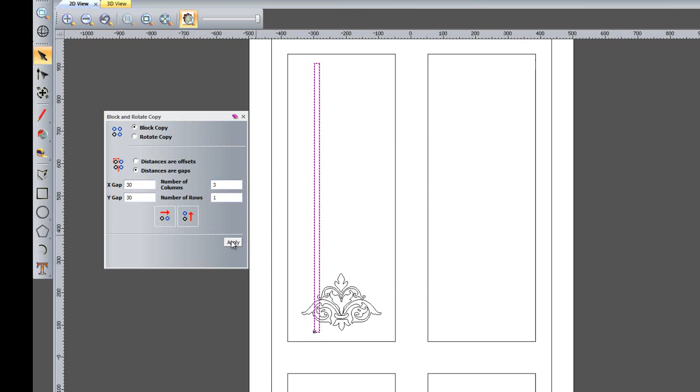It doesn't matter about the Y gap because I've only got one row, because I don't want any coming upwards or down in the Y direction. I just want X copies, and I want 3 pieces to go in X. So if I click apply, there you can see it's copied the part another 2 times going across.

And what I'm going to do with this is to group this again, just so they're all one part, and then shift select the rectangle, and I'm going to center that again. Now I'm going to ungroup this, so if I just hover over the group, you can see below that I have ungroup.

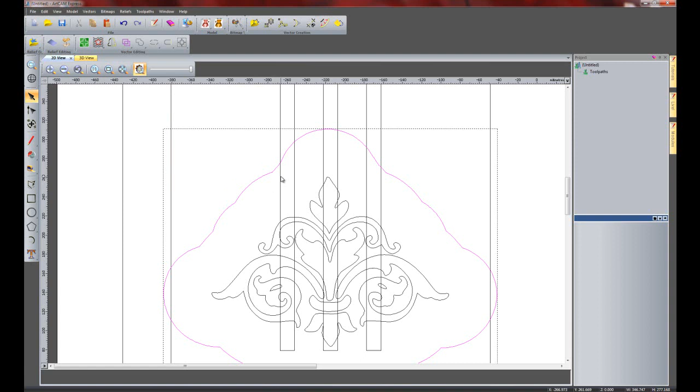And what I'm going to do is just zoom in on the flourish, and I'm going to offset this outwards by 50mm. So this is just going to break up all of the vectors and offset that outwards, because what I want to do is to trim off these rectangles to the offset.

So if I click the trim tool, I'm going to just trim these off here, and trim the offset off, and I'll just delete the waste piece. Now if I select all of these rectangles again, I need to just join those up, because at the moment it's 2 separate parts.

So if I click join, here you can see number of vectors now is 6, the number of vectors after is going to be 3. So there you can see that's 1 vector, that's 1 vector, and that's 1 vector. So that's the top left panel done.

What I'm going to do now is the top right one, and I'm going to show you how to import some vectors from various places. So if I click on the vector drop down and import, here you can see all of the supported types for ArtCAM Express. We have Adobe Illustrator, EPS files, AutoCAD files, DXF, DWG, Delcam files, and Meta files, WMF.

So what I'm going to do first of all is to open an EPS file. Here you can see Corner Art EPS, so I'm going to open that. Here you can see that's brought that in. Just zoom in on it so you can see - it's just a bit of corner art.

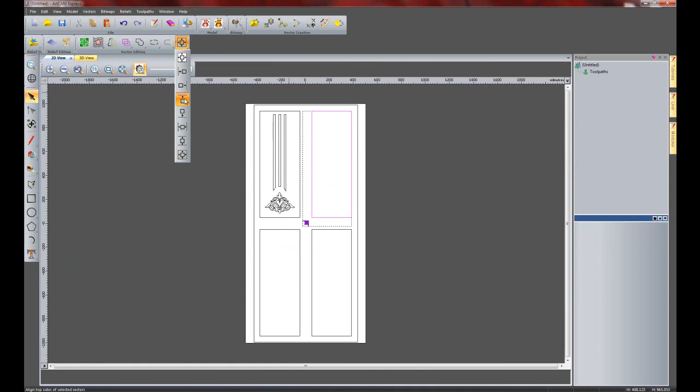And what I'm going to do is just align this. So if I shift select the top right rectangle, and I'm going to align it at the top, and then align it at the right, so it's in the top right corner.

Now what I'm going to do is to transform this. So if I click transform, and I'm just going to scale this up. This time I'm going to press shift just so it brings it the one way, and I'm going to bring it to around about halfway in between the rectangle on X. So that looks about right.

And I'm going to move this in X, so I'll move it by -20, and I'm going to move it in Y by -20, just so it brings it off the top and the right edge. So if I click apply, then you can see that that's moved that. So there we have our corner art.

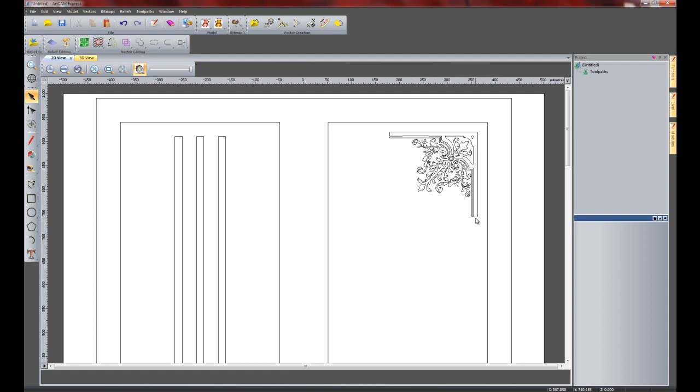What I'm going to show you now is how to do node editing. What I want to do is to make this section here, the vertical straight edge, longer - I want it to come down to about halfway on the rectangle. So the way that I can do that is to select the part, ungroup it so I can edit it, so it's all separate pieces, as you can see.

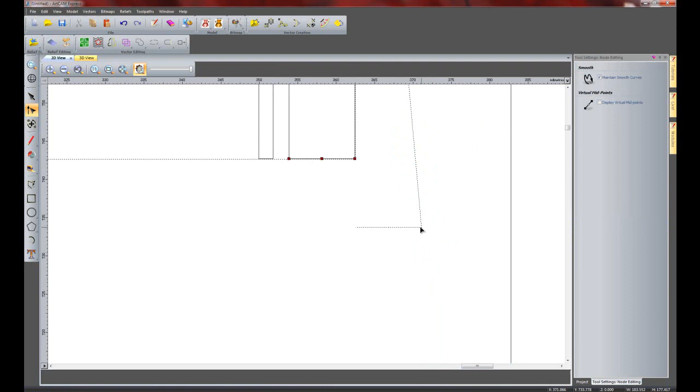And what I'm going to do is to select this vertical piece and click here for node editing. Now what you can do with these is to, if I just zoom in, here we have nodes, and what I can do is, let's say for instance select those, and I can move those. So there you can see I can start manipulating the actual shape.

And what I can do is, if I press Alt, it will give me an angle snap. So I can just move that down to there. I can do the same on this part, just select all of the nodes.

Now this is just a very brief introduction into nodes, and I'm just going to move that down to there. So there you can see I've moved both of the vertical pieces down just so it's almost at the centre of the rectangle. So what I'm going to do now is to just select all of that and then regroup it, because I want to make a copy of this.

So there you can see I've grouped that, and what I'm going to do now is to draw a vertical and horizontal line in the centre of this rectangle.

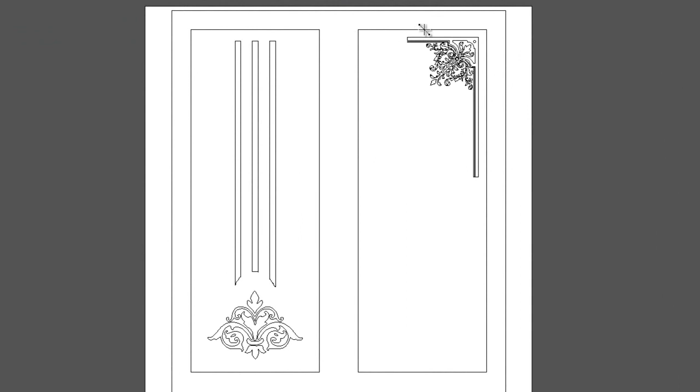Now the way that I can do that is if I hover over the rectangle, you can see I'll start to get this snap mode here. So I can click there and I know that that's in the centre of the rectangle.

Just going to bring it past the rectangle, doesn't matter where, as I'm just going to be using these as guidelines. So there you can see my two lines.

Select the corner piece and select the vertical line first of all, and I'm going to mirror this. So click on mirror vectors - I want to copy the original vectors and I want to do this about the line. So there you can see that's copied that over to there, but I don't want that on that side, I want it to be down here.

So if I select the horizontal line, this time I'm not going to copy and do it about the line. So there you can see that that's moved that to the bottom left of the rectangle. So I can delete my two lines now.

So there we have my two corner pieces. What I'm going to do now is to just create a line. I'll snap to the corner there, snap to this corner as well, and I'm going to go back into node editing. Now if I right click on the line, it gives me options for the nodes. I can also insert a node wherever I wish by pressing I.

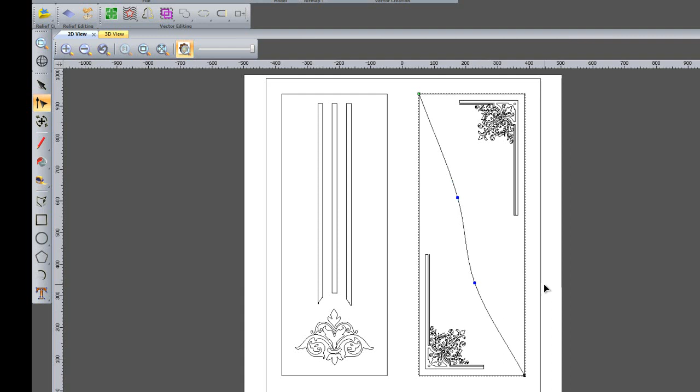So let's insert one there, and I'm going to insert one there. Now at the moment, if I move one of these, you can see it's just a jagged line. So I'm going to undo that, and press S over the top of it, and S over the top of this one.

Now if I move this, you can see it's creating a curvy line. So there you can see it's giving me a nice little curve. And what I'm going to do is just move the start and the end points inwards, so it creates this curve here.

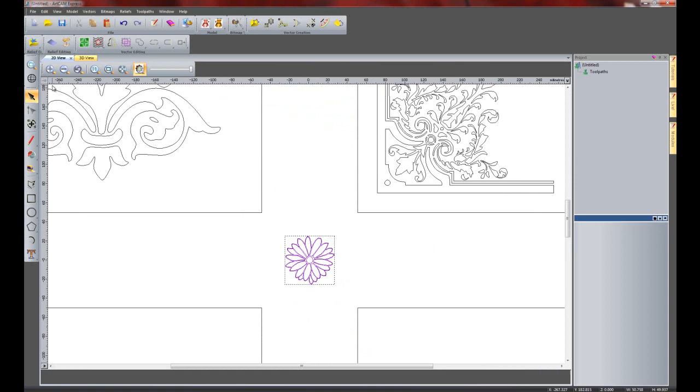And I'm going to import another piece of vector artwork. So if I click import, but this time this is going to be a DXF drawing. So click this flower and open it, and I'm going to group that straight away. I'm going to transform it just to make it a little bit larger. Let's make it about that large, and I'm going to select it, and then select this curvy line that I created. Now what I'm going to do is paste this along a curve.

Now this is really easy and it creates some really good effects. So just going to specify a number, let's say 6, and then click paste. So there you can see that's pasted that along the curve. I can delete those now. So there you can see my top right piece is designed now.

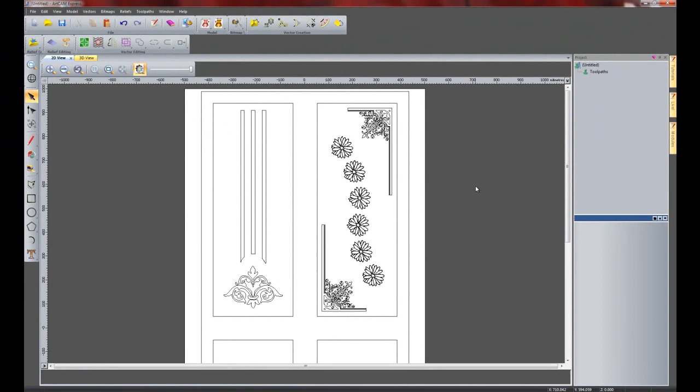I'm going to come down to the bottom left piece. What I'm going to do is first of all just press Ctrl and copy this flourish. Copy it to around about there, and what I'm going to do is create a new piece using this flourish.

The way I'm going to do that is go back to the block copy rotate. Previously we done a block copy. This time I'm going to do a rotate copy, and I'm going to select the origin. So I'm just dragging the crosshairs from this dialog page, and I'm going to move it somewhere above the flourish, let's say around about there, and I'm going to create 5 copies of this.

Now if I click apply, what this will do is rotate around and create a round flourish. So there you can see my round flourish.

Now if I zoom in on this, there's a little problem. Where it's rotated around, you can see that I have overlapping vectors. This, just to be completely honest, looks a complete mess here. It would take a good while to trim all this and join it all back up. But within ArtCAM we have a tool called Weld Vectors. So if I click Weld Vectors, this will automatically do all this for me.

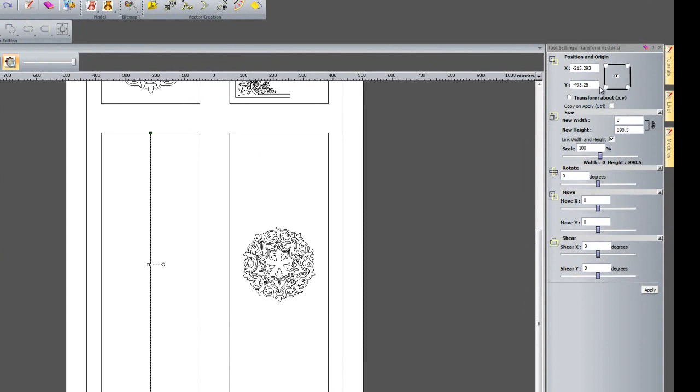And what I'm going to do is create a line, or vertical line in the center, and I'm going to transform this. So at the moment it's 890.5 millimeters. I'm going to change that to around 600 millimeters and apply that.

And I'm going to do a paste along a curve again. Obviously this is a straight curve. So if I select that, I'm going to do this 3 times and click paste. So there you can see that's pasted that along the curve.

Okay, so now what I'm going to do for the bottom right design is use some clip art. Now ArtCAM comes with over 500 pieces of clip art in any version. So this is all available within ArtCAM Express, and even though in ArtCAM Express you cannot create 3-dimensional reliefs, you can import them from the relief clip art library.

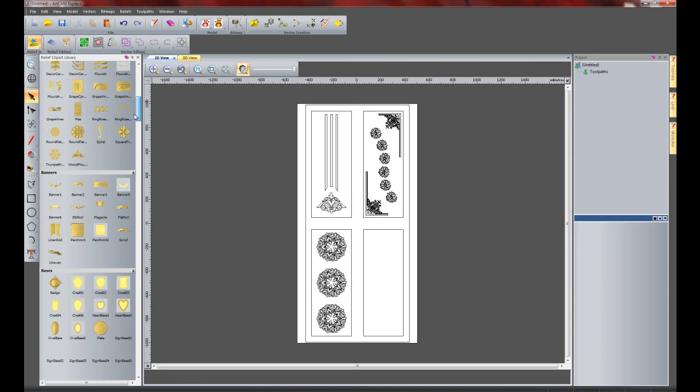So here you can see we have lots and lots of different reliefs. For instance, crests, animals, we have greenery. What I'm going to do is come up to the architectural stuff, and I'm going to use this wood flourish, a lot like the one that we have here, and I'm going to select that, and then shift select the bottom right rectangle, and I'm going to center that.

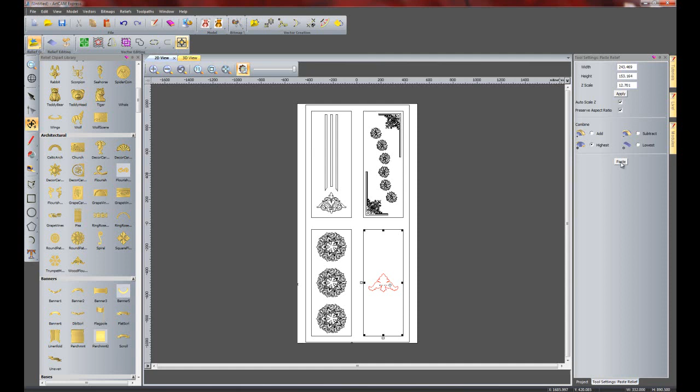Now I can change the height of this or the width, I can change the size of this. I'm not going to do that for this particular one, and I'm just going to click paste. So if I go to the 3D view now, here you can see that's pasted that relief into the 3D view. So there you can see quite a nice little flourish.

Go back to the 2D view. What I want to do now is maybe put a texture on the back of these, so it's got like a little texture on the back of there. So if we come down to the textures, I think I'll use this crumpled texture here. So if I select that, and I'm going to move that up to here, and what I'm going to do is just resize this texture and snap it onto the rectangle.

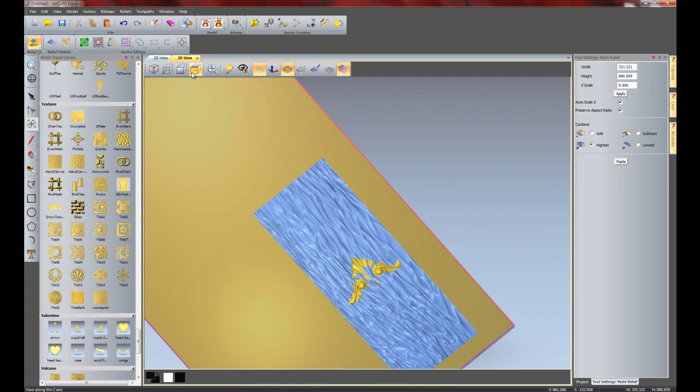So there you can see that's snapped onto the rectangle. If I go to the 3D view, it will give me a blue preview, and you can see it's cutting through the actual flourish there, so I need to drop the height of this down.

Let's say 1.5 millimeters and apply that. So there you can see it's now at the back of the flourish. I'm going to paste that down now, and I can close that. So there you can see the flourish with the texture on the back.

So I can now close the clip art library, and this piece is ready to be machined. So if I click here, this shows all of the toolpaths available within ArtCAM Express.

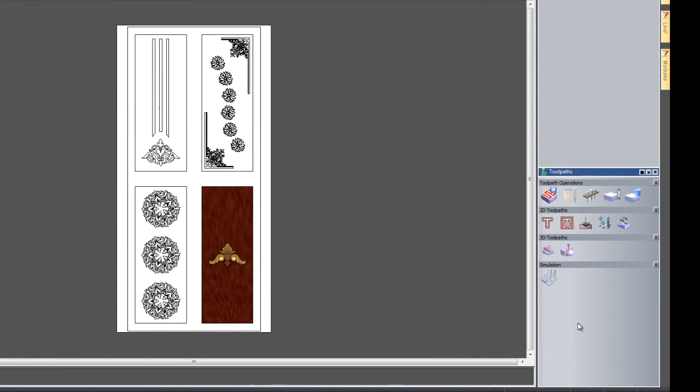What I'm going to do is to select the top 2 rectangles and create an area clearance toolpath. Just move this over to the right so you can see a little better, and here it asks me what I want to use. The selected vectors have both my rectangles selected. Start depth, finish depth of 5 millimeters, and I'm going to add a tool for this. Let's use the largest tool that I've got, a 12 millimeter end mill, and I'm going to click calculate now.

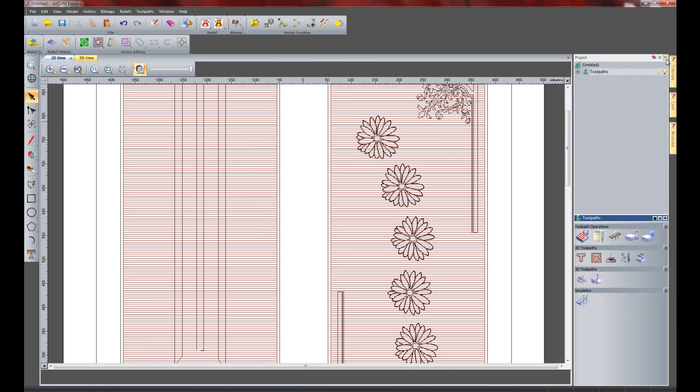So if I just zoom in on this, you can see that that's created the toolpaths, which are in red. If I wish to turn these off, here you can see the area clearance. I can just click on the light bulb here. That turns it off in the 2D view. If I go to the 3D view and click this light bulb, that turns off the visibility of the toolpaths within the 3D view.

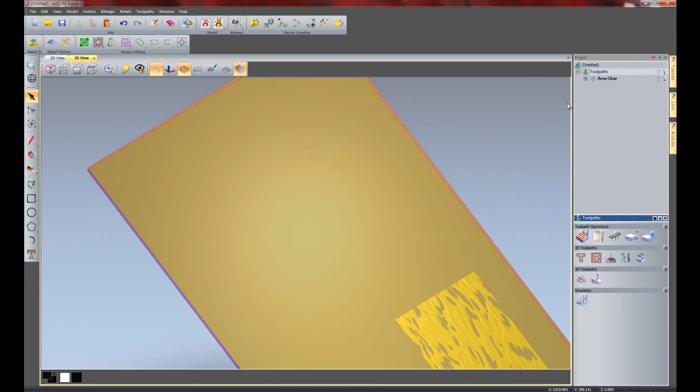So I'll zoom back out so you can see, and what I'm going to do is to just select all of the inside of the top left rectangle. I'm going to create a new area clearance, and the start depth is going to be 5mm this time because I've already blasted all of the material away. Finish depth is going to be 10mm, so this is going to cut 5mm down, and I'm going to use a 3mm end mill. Now you can add your own tools to this database. I'm going to click calculate now. So that's machined all of the inside there.

Turn off the visibility, and what I'm going to do now is some V-bit carving on all of this artwork here. So click create V-bit carving. The start depth, now I'm not going to change this. I know that this needs to be 5mm, so I'm going to show you how I can edit that afterwards. I'm going to do the start depth of 0, and I'm going to use a small V-bit, 6mm. If I wish to know the maximum depth that it's going to cut, I can click there and it will tell me the maximum depth, which is 6.6mm. Use a roughing tool if I wished, if I were doing really large carving, and I can click calculate now.

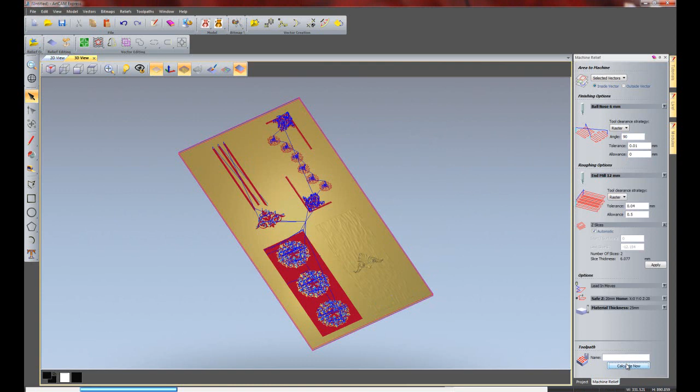And the roughing, use a 12mm end mill, and we're just going to click calculate now. So there you can see that that's creating the roughing toolpath. And now it's creating the finishing toolpath.

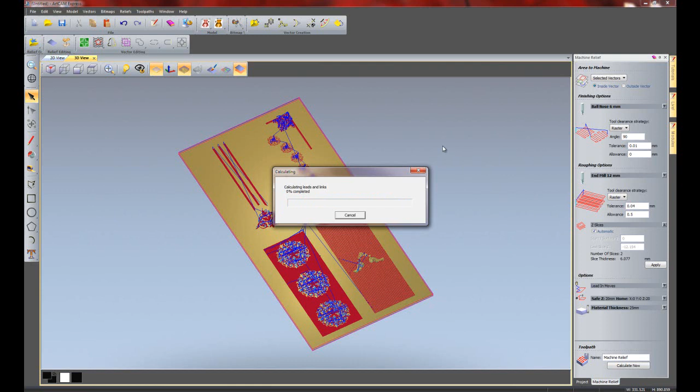So that's finished machining that. I can turn off all of my toolpaths, and all that I need to do now is to cut the part out.

So this is quite a basic toolpath, which is the create profile toolpath. I can go outside, along or inside the vector. I'm going to go outside, finish depth of 25mm, select my profiling tool, 12mm end mill.

I can add a lead in if I wished. If I had the advanced 2D machining, I could add a lead out as well. I can add a bridge to the start point. So ArtCAM Express, the basic version, lets you add one bridge to the start point.

If you want multiple bridges, then it's the advanced 2D machining. And I can also add ramping moves if I wished. So I'm going to click calculate now, and then if I right click, I can simulate all of the toolpaths, or I can click here to simulate all of the toolpaths.

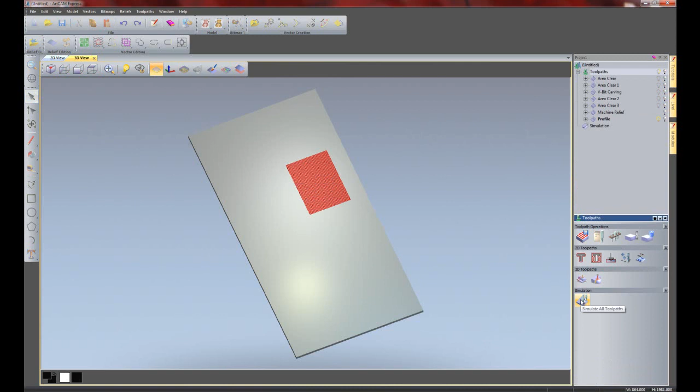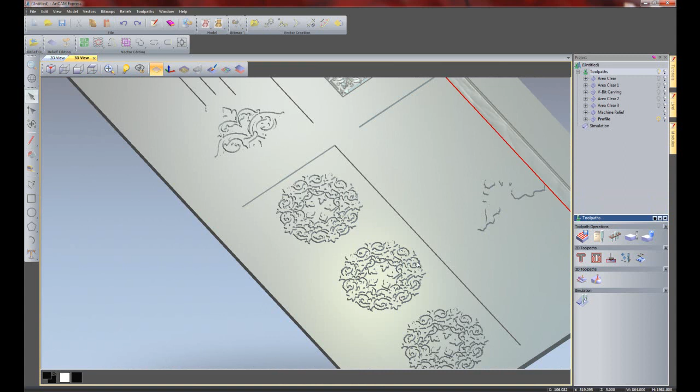So this is just giving me a simulation of what's going to be cut on the machine. So if I just zoom in a little bit, you can see what's actually being cut. See the V-bit carving up here.

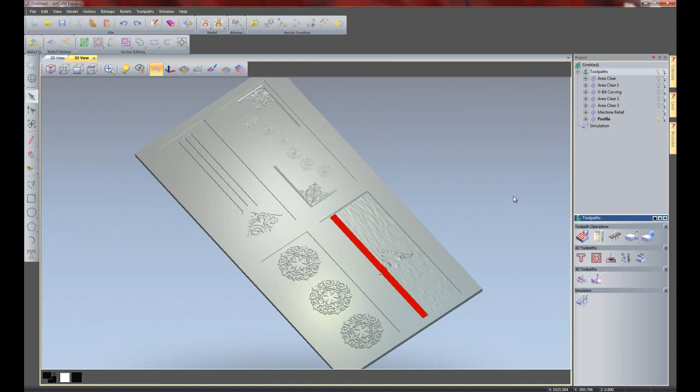And this is creating the machine relief, the 3-dimensional toolpath. And then finally cutting the part out.

So if I take a plan view of this, what I can also do is select the simulation, and I can change the material. So let's say I wanted to use medium oak vertical, and that allows me to colour in the simulation.

Now if I wish to send this to the machine, just quickly go through this. I can click toolpaths and save toolpaths. Whichever toolpaths I want to send to the machine, just move those onto the right hand side. Let's say I wanted to use those four, and to choose my post, ArtCAM comes with over 200 posts.

These are included in all the versions of ArtCAM, even ArtCAM Express. We also have a standard generic G code post that you may be able to get your machine to run with. So you just choose your post processor and then save the toolpath, and that gives you your G code to be sent to your machine.